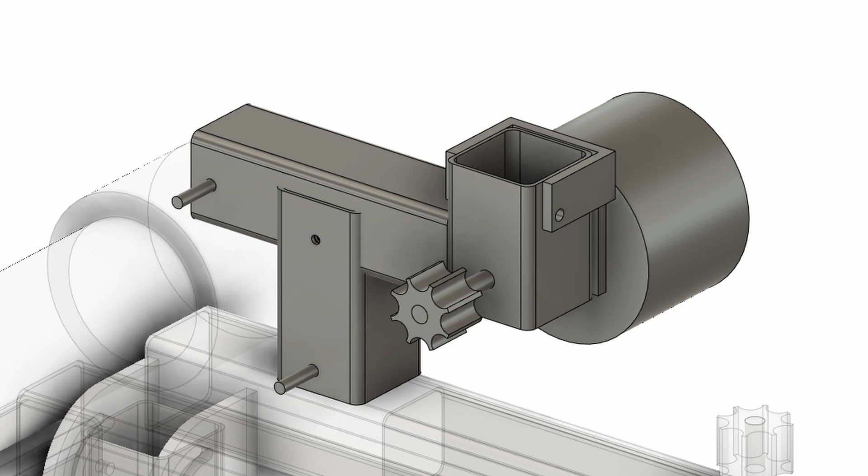And for the bottom one, I used the larger pipe that I had, and for the top one I used the smaller one because eventually we want the top one to fit inside of the bottom one, so that it can pivot clockwise and counterclockwise so that we can have a spring that goes from the left of the top one to the bottom of the bottom one, so that it'll spring it in a counterclockwise rotation to make the belt tensioned.

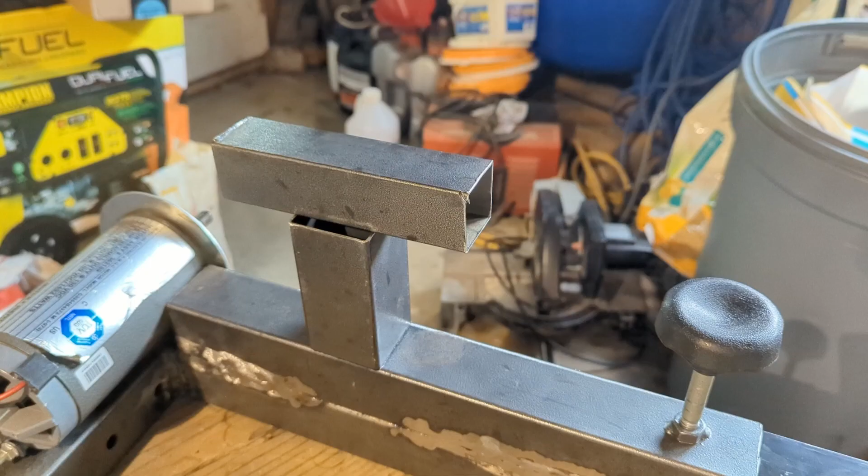Alright, so the small piece is done. I cut it to length according to this. Next, what I need to do is cut out a little slit in here so that this can drop in it basically, and then I need to cut this piece, which is gonna be right here, and then figure out where I want the center, drill a hole here, drill a hole here, and that should give it the pivot ability right here as seen on this diagram. So I'm gonna cut the slit now so that I can drop it in and see how it fits.

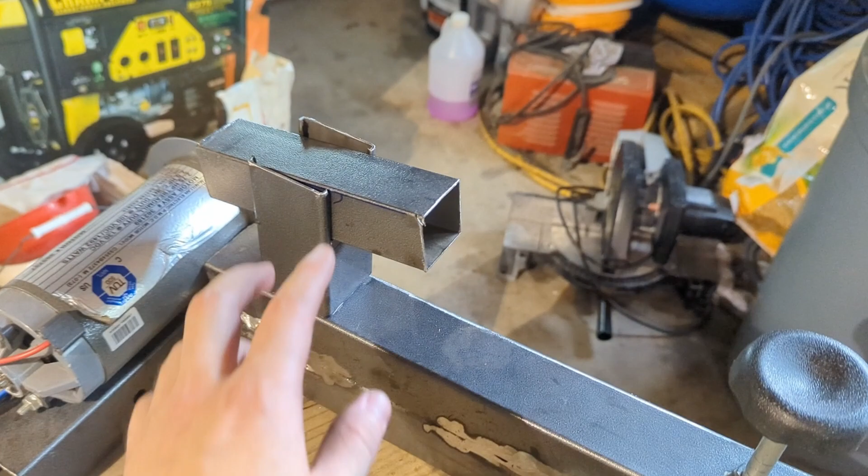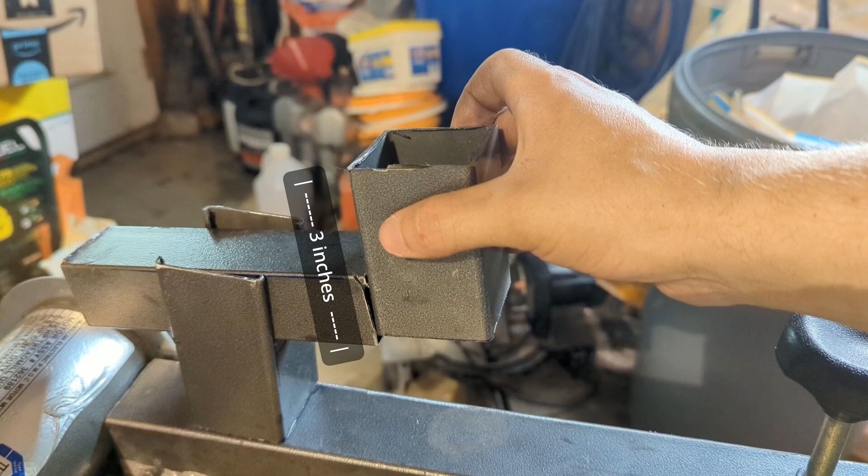Alright, so I cut this slit right here, which allows this piece to kind of rock. So I just need to position it up so it can do the movement. And then I also have this piece which goes here, and on there is going to be mounted a little bracket that can go in and out, and essentially the roller is going to be attached to that bracket. So just like this picture here, this piece and this piece are what I have right now. So I just have to weld these together and then stick a bolt through here to provide a pivot point.

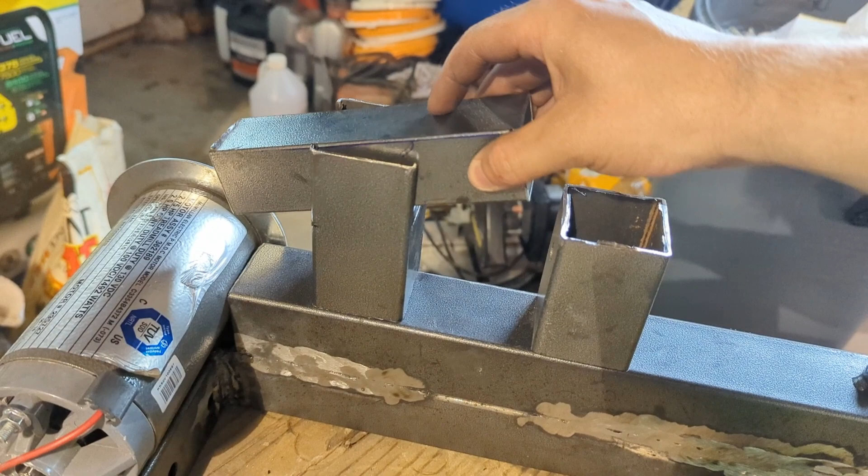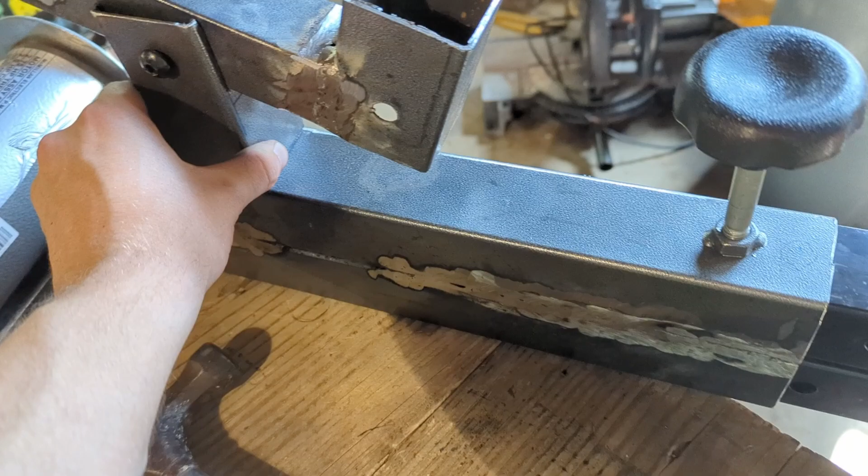Just finished drilling the holes. I stuck a bolt in from the extra bolts that I have from the treadmill and the squat rack, and this is how it looks. If I let go, it'll just turn over, but it's gonna be welded or bolted here, haven't decided, and it works pretty well. So I'm gonna have this much travel, which is really nice, and it seems to move pretty freely, so I'm really happy with that.

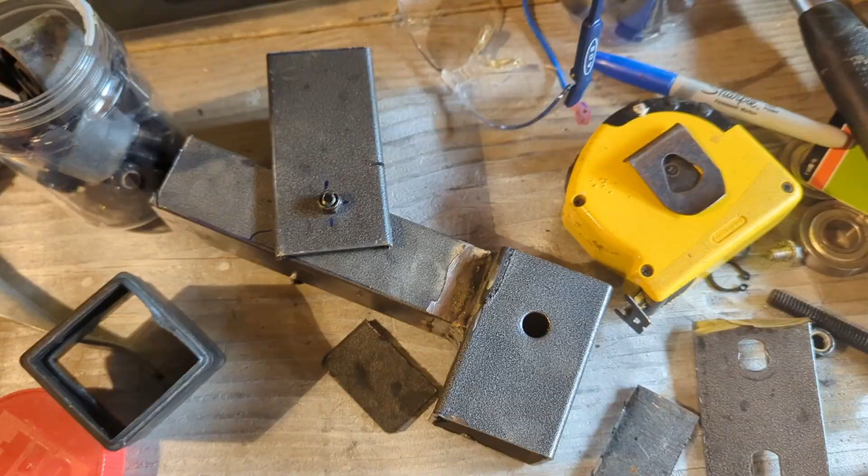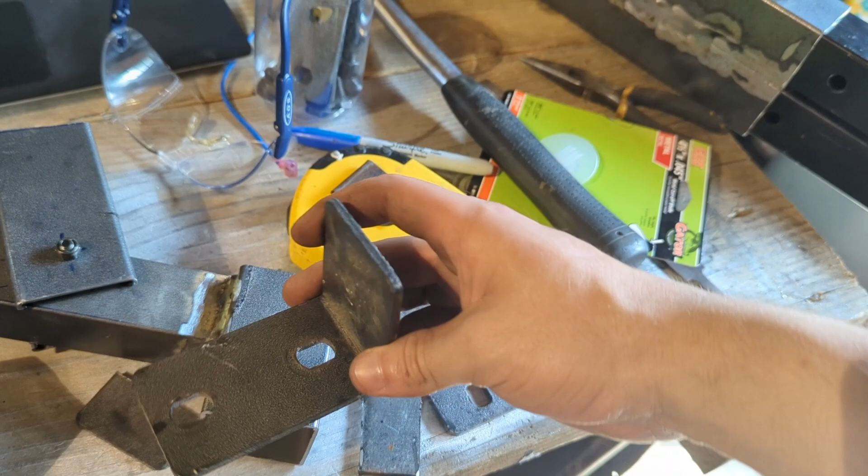So now that we got this, I'm going to try to make this part here that a bolt goes through so that it can actually move like this. So I just got, it was actually this thing. I don't know what it was for. I think it was for the rack, just a mounting point. Anyway, I cut it up, still a little warm. I'm going to go like this. Woo! That's spicy. I'm going to go like that, essentially, and then same thing on the other side. And then hopefully that'll give me the little thing, and eventually a hole is going to be drilled right here and onto the other side as well.

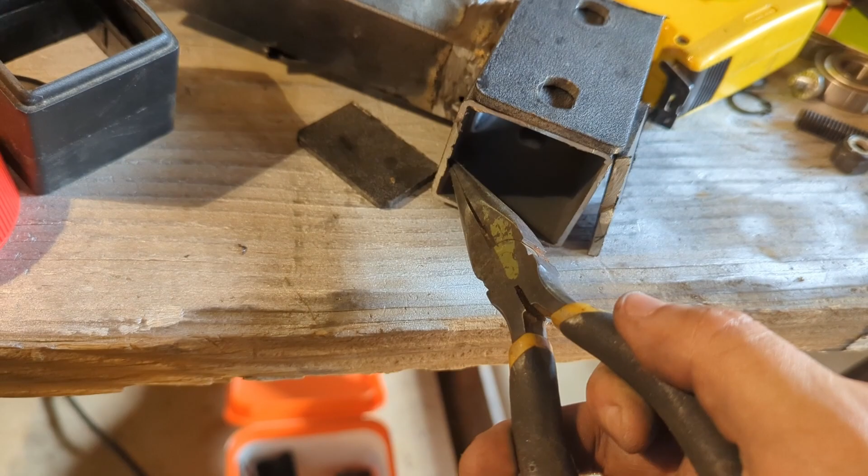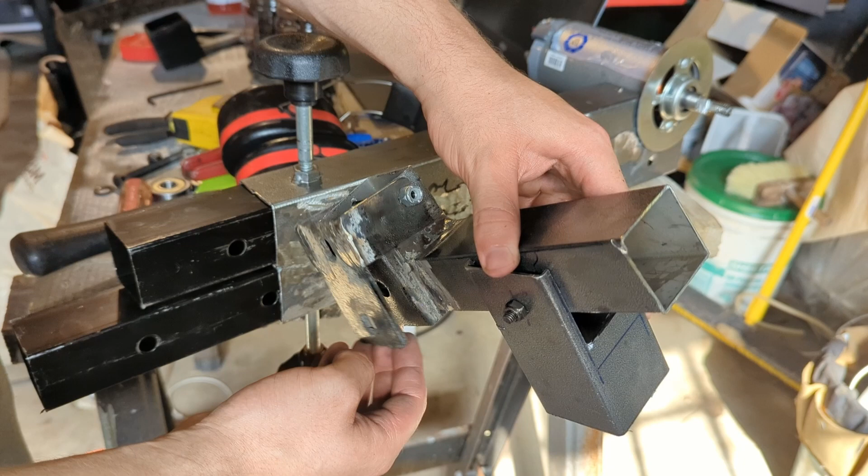Alright, so here's what we got for now. We got this, and also this. So this is going to be the tracking mechanism. It can go a little bit angled inwards and then more outwards too. So I think that should be fine.

And then I'm going to weld the thing that the wheel goes on right here. And then from this side, I'm going to weld a nut right here. And then a bolt is going to go through here out of this hole,

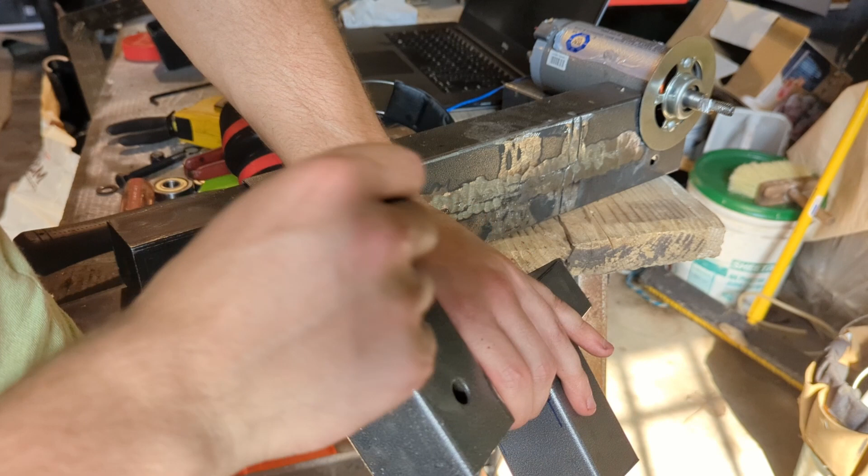and then that's what is going to push this forwards. And naturally it's just going to want to go like this. It's not going to want to go flat. It's going to want to go down because the weight of this cylinder is going to want to push it down, and when it pushes down it's going to want to go this way.

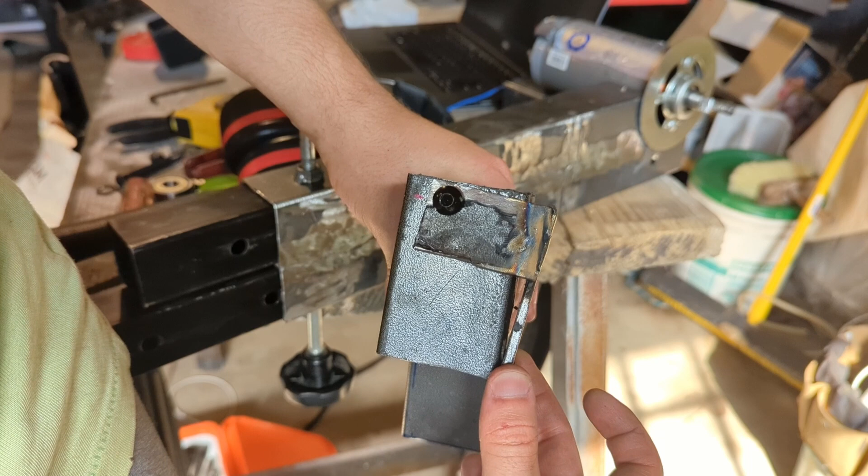So what I'm going to do now is actually take this bracket and I'm going to weld this tracking mechanism to it just like that, and then I'm going to bolt the bracket to this frame here, because if I don't end up liking how this tracking mechanism works, I'm going to go to something simpler.

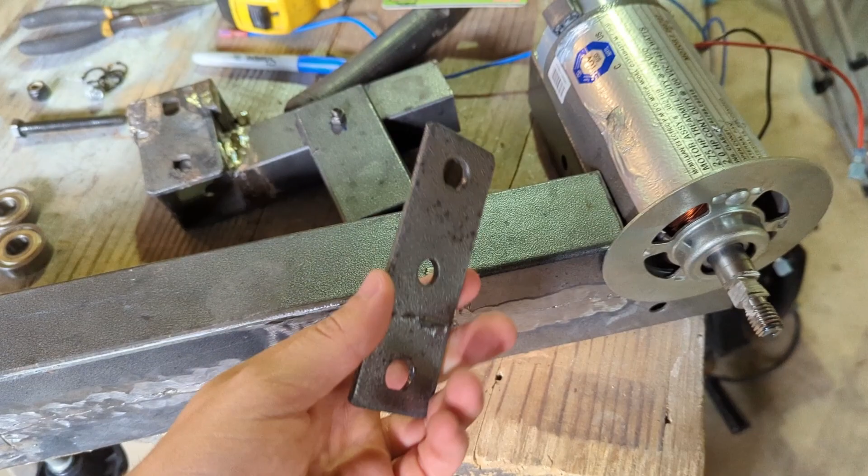So I don't want to weld this whole thing onto this frame. Also, it makes it easier if I have to disassemble everything. I can just unbolt this and then have this whole thing separate. So I'm going to weld this to this real quick.

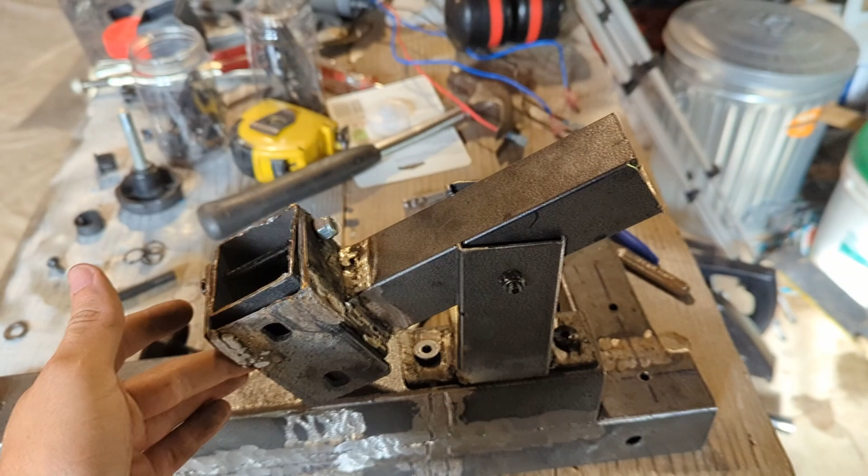Alright, so that turned out fine. Welded this bracket onto this piece, and now this piece is bolted onto the frame. So it's on there. Now this thing can move and go this way.

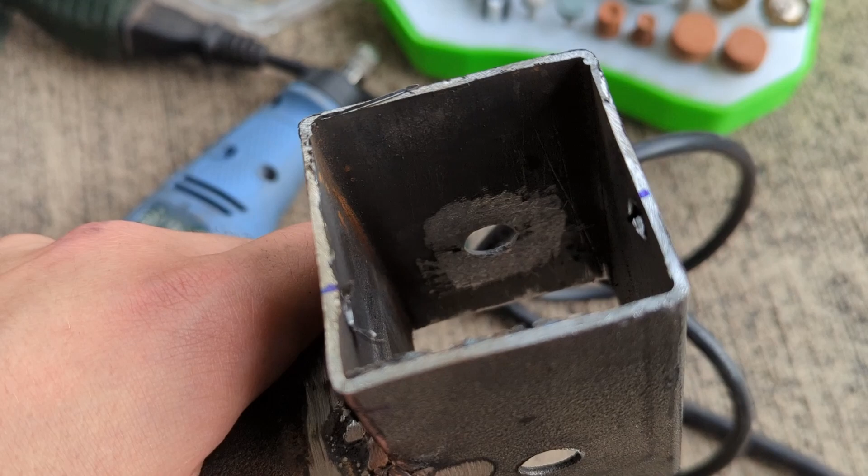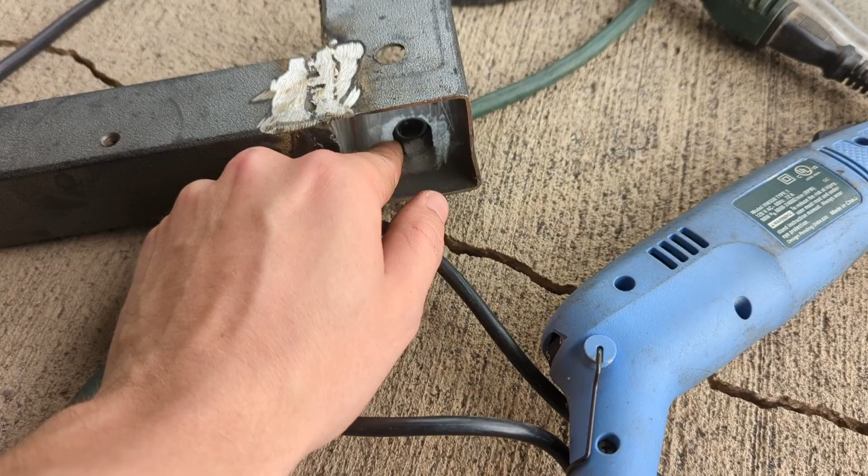So I just took this Dremel and I sanded out the inside of this. So the plan is to get a nut and then put it on the inside and then weld it here so that the bolt goes in here and then it gets centered by this nut as it goes through.

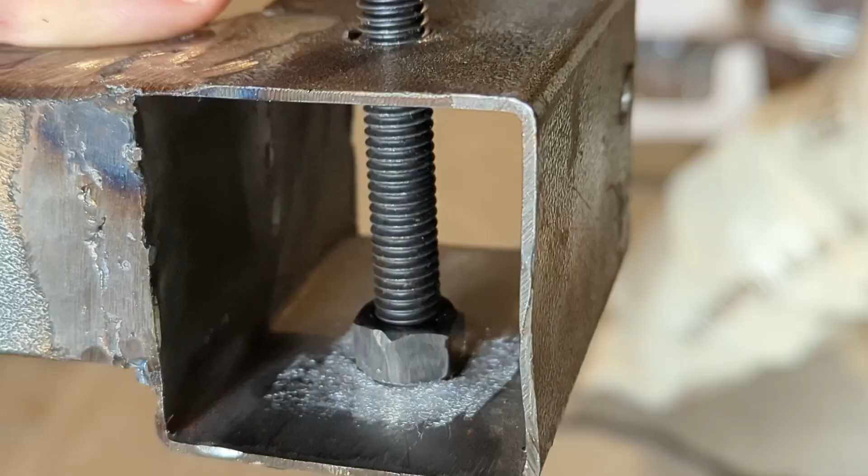So hopefully I can actually weld this. What I did was bolted it through the opposite way that I want it, so that the nut is up against the metal part, so that's gonna make it a lot easier so I can weld it.

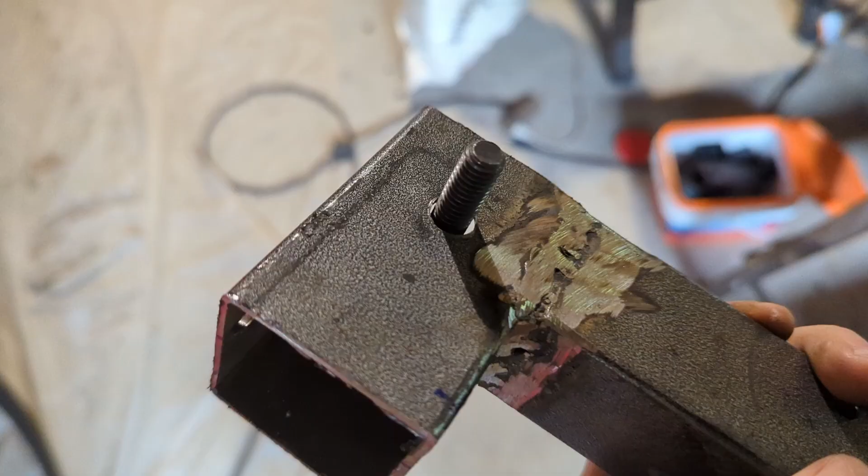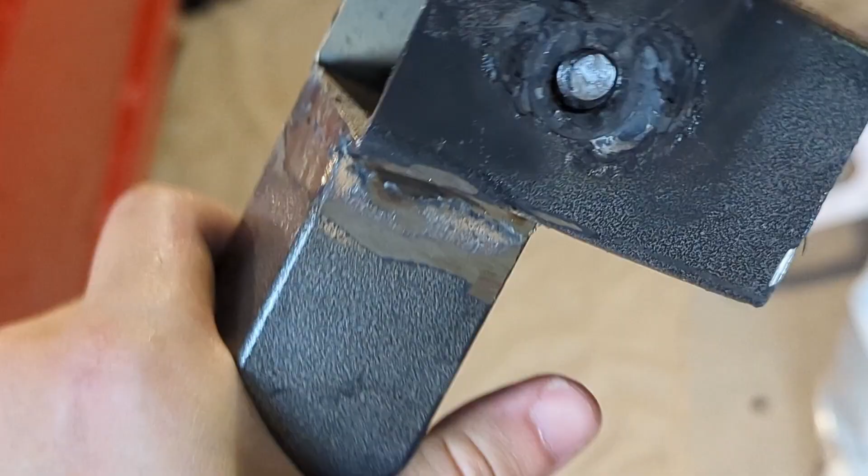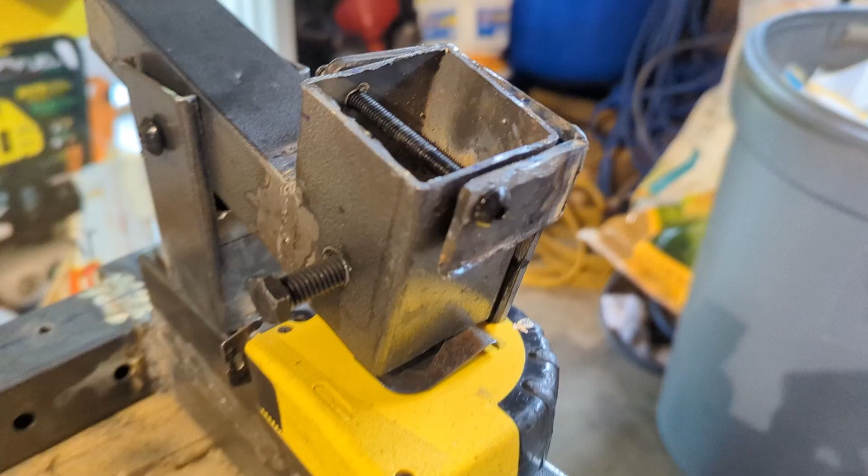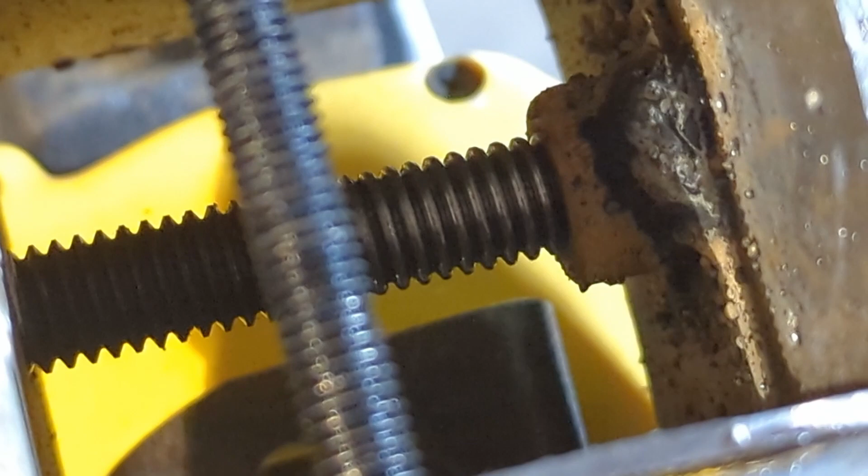Alright, so I finally got the old bolt out and the new one in. The threads were kind of messed up on this nut, so I don't know if you can see it, but the bolt is kind of dull from going in and out, basically. But that's fine because this is the only bolt I'm going to be using for this, so if it gets dull to match the nut, I don't really care.

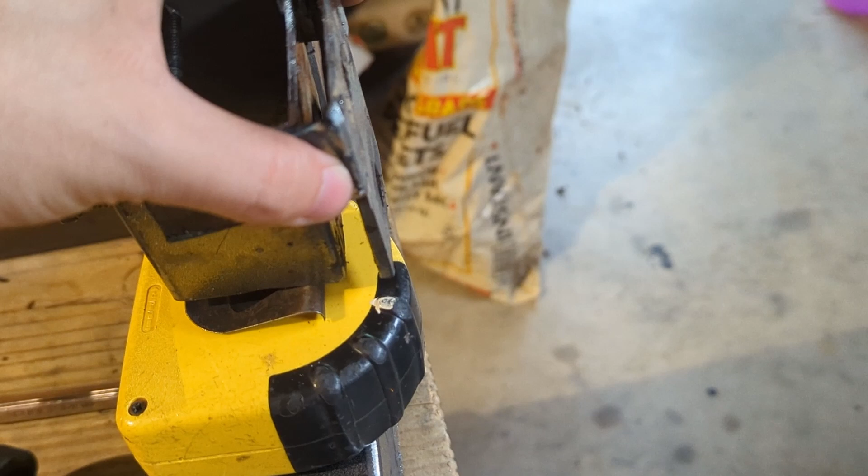So whenever I turn it in, it should go this way, and then right now it's not out at all, so it's all the way down.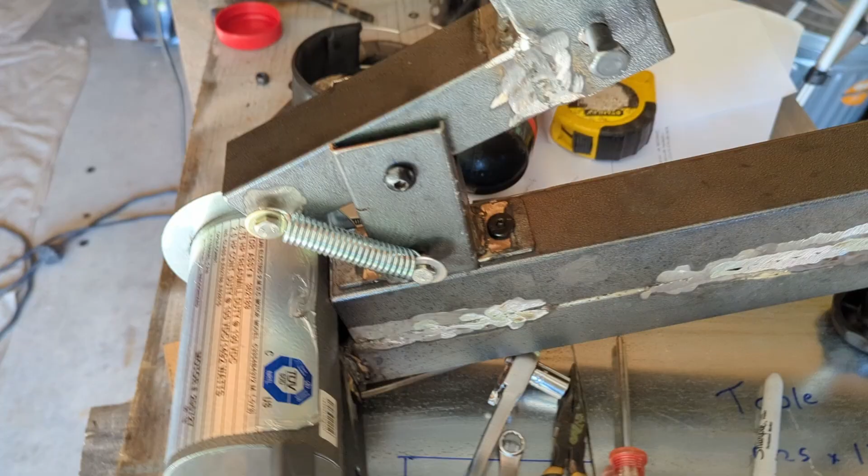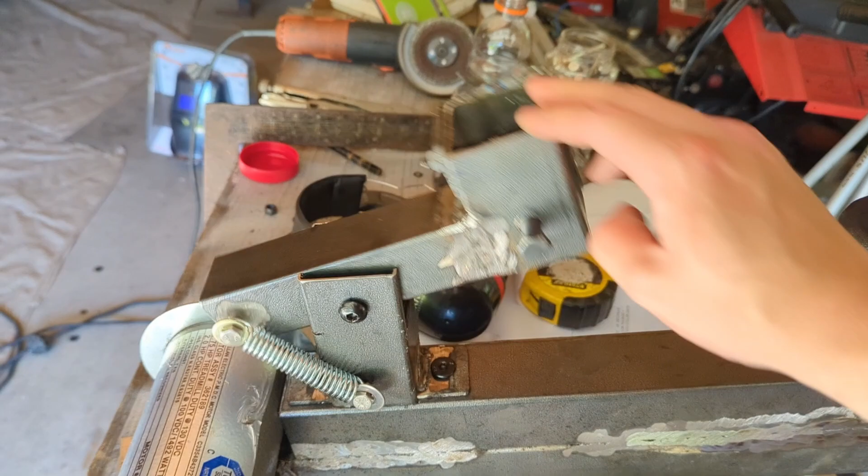I just put this spring tensioning system on here. Basically I just drilled a hole in this, a nut and bolt, and then put a washer on so this spring doesn't slip off. So alright, so there we have it. The tensioning mechanism is done, so video 4 is complete.